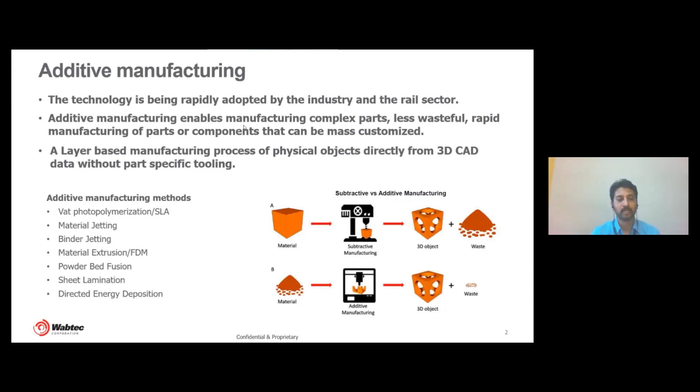Whereas in binder jet, we use glues between layers to join the metal with a post-treatment process. The material extrusion or fused deposition modeling method is used for polymers, in which the extruded wire is used to form the part. In this method, the fusion is achieved by heat. The last one which we'll be discussing is powder bed fusion, which uses laser energy to fuse the material powder together layer by layer.

Let us move to the process and benefits of additive manufacturing. The first step of additive is to design a part in a computer-aided design environment, which is the CAD environment, and process it in a slicing software where the parts are made into thin layers. The second step is these layers are printed into a real part in the additive machine with a suitable technology which we discussed in the previous slide. The last step is the printed parts are removed from the machine, the extra materials are removed, cleaned, and surface treated, depending on the part or design requirement.

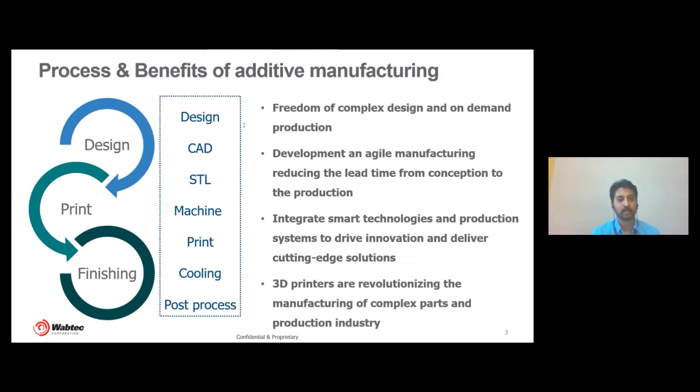Additive manufacturing enables manufacturing complex parts that wouldn't be possible in conventional manufacturing processes at all. As the method directly uses the CAD model and no special tooling is required, the lead time is reduced, and this complements the agile manufacturing process. Already 3D printing has completely revolutionized the prototyping industry. Now 3D printers have started revolutionizing the production sectors where complex parts are required to be manufactured. Additive manufacturing is part of Industry 4.0, with integrated smart technologies and production systems to drive innovation and deliver cutting-edge solutions.

Let us go through the applications and a few of the use cases of Wabtec additive. Here are some quick examples of printed parts ranging from prototyping to tooling to fit-up. The first one is the battery housing and the second one is the housing of an inverter, which was printed for a battery electric locomotive application. The middle one is a turbine wheel for a new development in turbomachinery application.

A number of parts have been printed for tooling applications and mock fitment trials as part of the product development process using additive technology. Building these prototypes helps to avoid the tooling cost, expensive iterations in the design process, and the lead time required. Additive manufacturing overall helps in rapid design iteration, which we will also see in a use case in the coming slide. Overall, additive manufacturing helps in improving the design quality and shortens the product development cycle, thereby reaching the market faster.

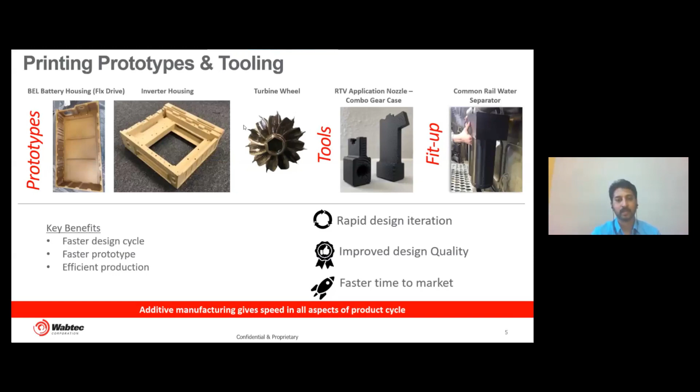So here is the first use case. The component under discussion here is an exhaust cover subjected to continuous cyclic load which had failed in testing in the past. So the stress analysis of the part was studied and the existing manufacturing method had limitation in the design to achieve complex cavities and material thickness.

The exhaust cover was further redesigned suitably to manufacture by multi-jet fusion additive technology. The complex cavities and protrusions were possible in the adopted design thanks to additive manufacturing technology. In no time, the part was printed, tested for endurance cycles and was validated successfully.

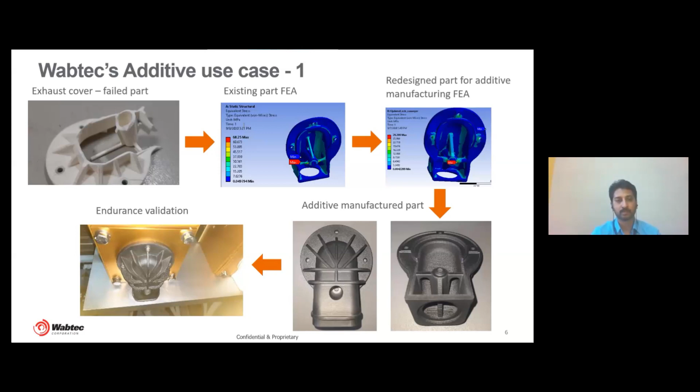Let us move to the second use case. This example is on use of additive manufacturing to carry out multiple design iterations to find out the root cause of assembly issues and converge on the appropriate design. 3D scan was performed on the existing manufactured bush to capture the geometry profile which had an issue in the assembly. The profile was studied with the mating assembly component to observe the interference.

Multiple parts were printed with varying profiles of the bush to identify the best fit of the assembly. The final required profile was concluded by this iteration in a faster and cost-effective way. This would have in no way been possible with a conventional manufacturing method to reach the conclusion in such a short span and without any major tooling requirement. The final design was implemented in the product successfully.

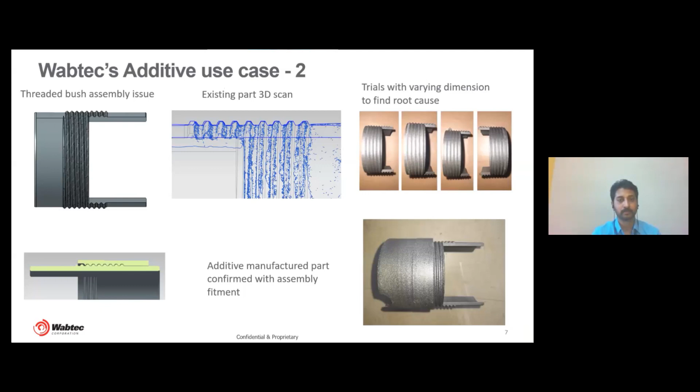The third use case is on an aluminum manifold assembly, which had complex machining, and the number of components has been reduced to one part through the design excellence of additive by the Wabtec team. This process enabled weight reduction by more than half from the existing design, eliminating the complex machining process and assembly process, leading to material saving, cost reduction, and elimination of tooling requirement. The reduction in number of parts and assembly also led to increase in the reliability of the product.

The solution also helps in lowering the life cycle cost of the component due to fewer replacement parts in the assembly. Wabtec's principle of delivering sustainable products to the railway industry is once again proved with this lower weight and highly reliable brake control assembly using additive technology.

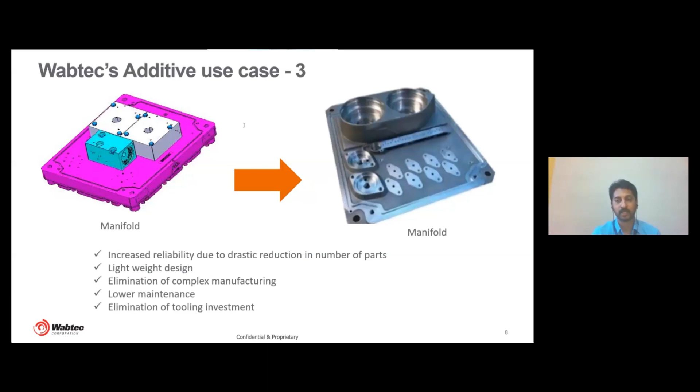Coming to spares and services business, railway products have longer service life. Over the years, the parts become unavailable and obsolete due to outdated parts or the manufacturer doesn't produce these parts anymore. In order to maintain high service level, the spare assets that need to be stocked increase due to the fact that the demand of the parts is difficult to determine with certainty. Managing spare parts is one of the key issues in the railway industry.

For small order batch quantities, it is not at all economical to make the tooling. Hence, companies end up ordering higher quantities of spares than required, and those occupy significant space in the warehouse as inventory. Additive manufacturing can help in faster, efficient, and quality fulfillment of obsolete low volume parts.

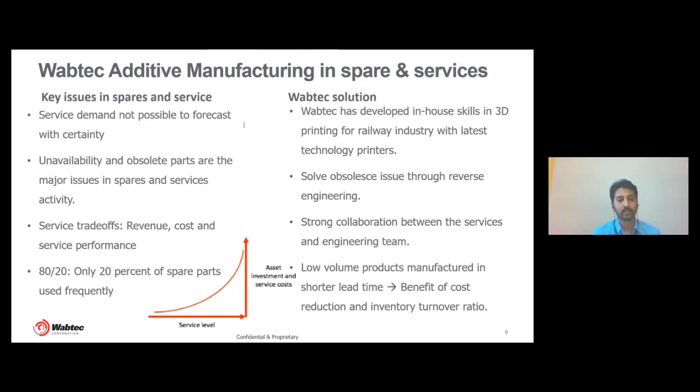With Wabtec's strong competence in the railway industry and with in-house skills in additive manufacturing, design, and reverse engineering technologies, the supply uncertainty and obsolescence issues can be addressed effectively with low volume products manufactured by the additive method, which leads to shorter lead time, making the inventory turnover ratio higher, thereby reducing inventory investment required in the spares warehouse.

Let's move to the last part of the presentation on Wabtec's competence and capabilities in additive manufacturing. Wabtec has invested in a wide range of machines to print various materials, sizes of parts, and capacity. The direct metal laser melting machine has been able to print Inconel and stainless steel with sizes as big as 350 millimeters. The metal jet binder machine can print stainless steel materials of size up to 390 millimeters.

We have access to an upcoming metal laser printing machine for aluminum for bigger sizes up to 850 millimeters, which is again a metal laser melting solution. Different polymer printing machines with Wabtec can handle different requirements and materials. Parts can be printed to a size as big as 1.2 meters with a wide range of polymer materials like nylon, polycarbonate, polyacetate and various polyamide grades, and also includes polyamide with glass-filled composite.

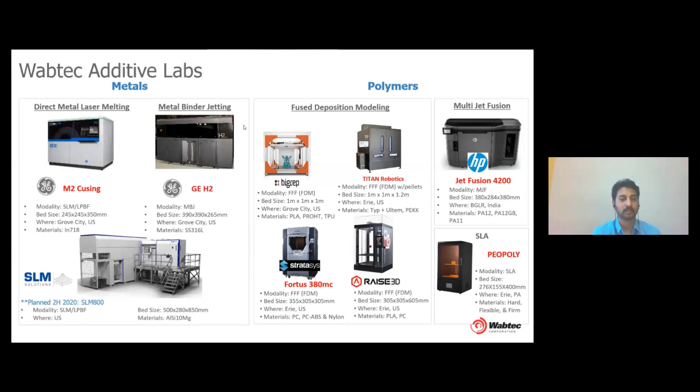Wabtec is part of the ecosystem of additive manufacturing and has access to the latest machines, technologies, and developments in this area. So let me take a minute to summarize how Wabtec makes a difference to the railway industry through additive technology. As an organization, we have strong understanding of railway requirements combined with additive competence developed over years with design, materials, and process knowledge.

The knowledge, best practices, procedures, standards, and measurement technologies required for additive manufacturing have evolved in the organization. With the investment in latest technologies, printers, and competence developed over time, Wabtec is your right partner for additive solutions for the railway industry.